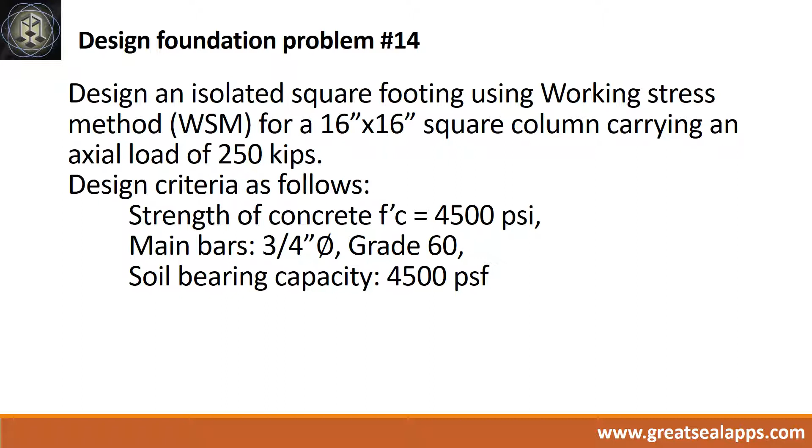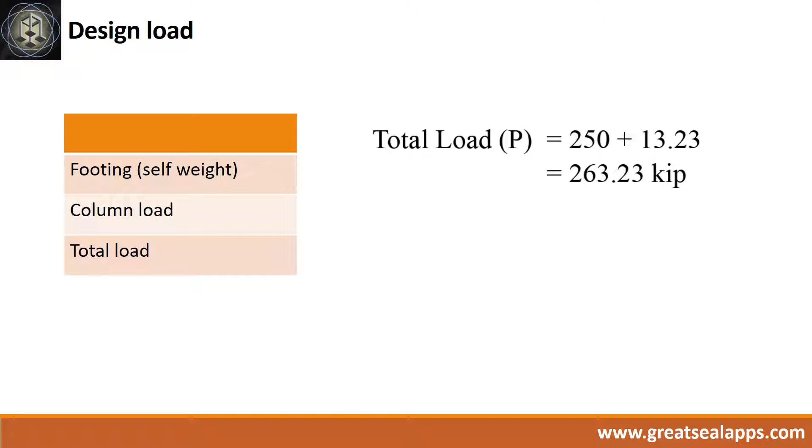Design an isolated square footing using working stress method for a 16 inches by 16 inches square column carrying an axial load of 250 kips. Design criteria as follows: strength of concrete 4,500 psi, main bars 3/4 inch diameter bar grade 60, soil bearing capacity 4,500 psf. The footing carries an axial load of 250 kips. Assume a self-weight of 13.23 kips for a total load of 263.23 kips.

Enumerate input parameters required. Footing name F14. Square shaped. Depth from natural grade line 5 feet. Main bars 3/4 inch diameter at grade 60. Strength of concrete 4,500 psi. Soil bearing capacity 4,500 psf, a 16 inches by 16 inches column on top of footing with total load of 263.23 kips.

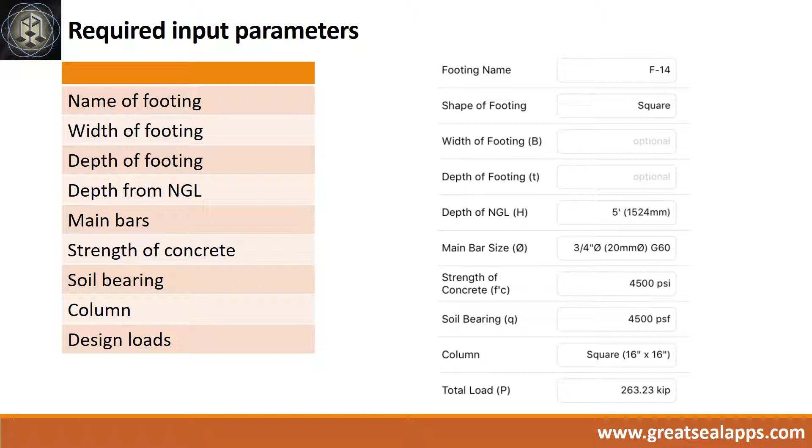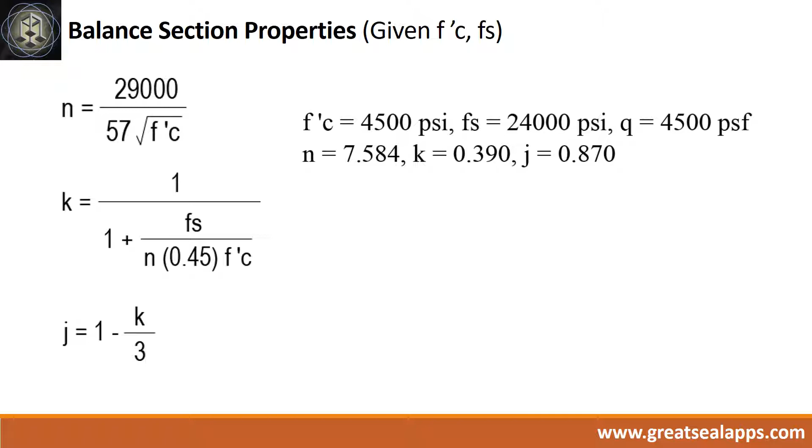Given Fc prime equals 4,500 psi, Fs equals 24,000 psi, the balance section properties are as follows: n equals 7.584, k equals 0.39, j equals 0.87. Given P equals 263.23 kips and Q equals 4.5 ksf, the width of footing is 92 inches. Net upward soil pressure is 4,254 psf.

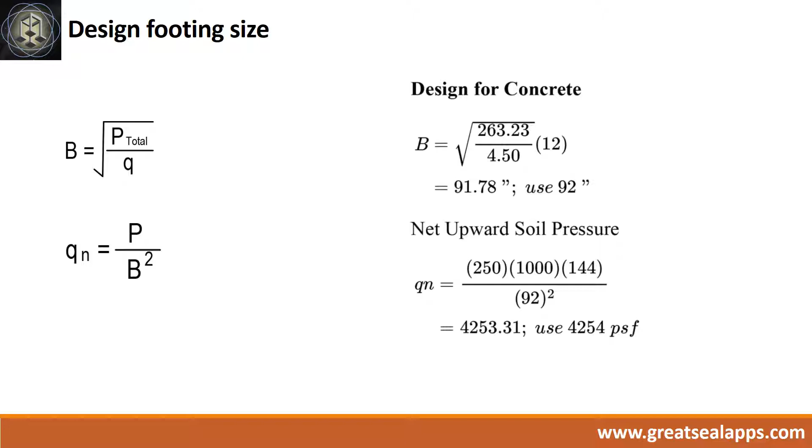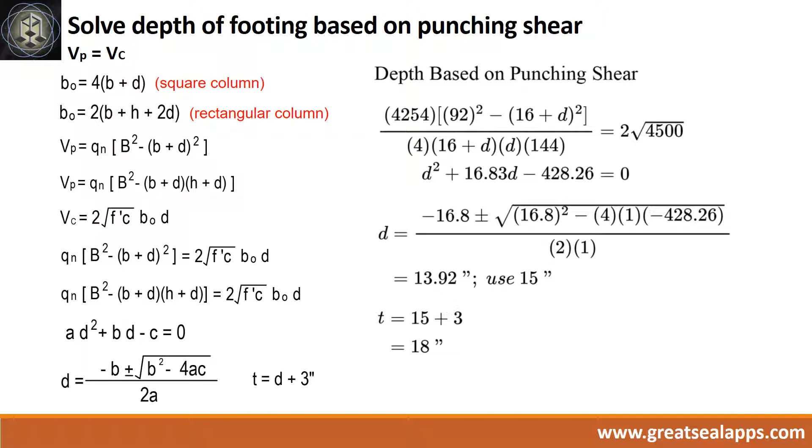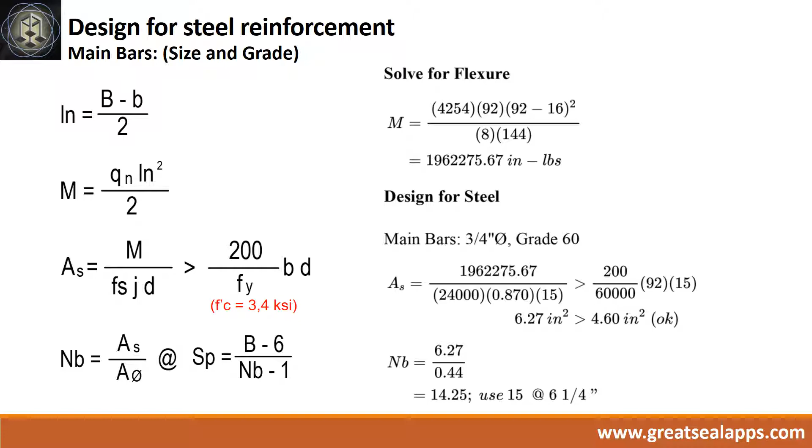Critical sections for punching shear, beam shear, moment and bond shear. Following the given computations, the effective depth is 15 inches and total depth is 18 inches. Given footing width of 92 inches, 16 inches side of column, and net soil pressure of 4,254 psf, the moment is 1,962,275.67 inch-pounds. The area of steel is 6.27 square inches. The number of bars for 3/4 inch diameter is 15.

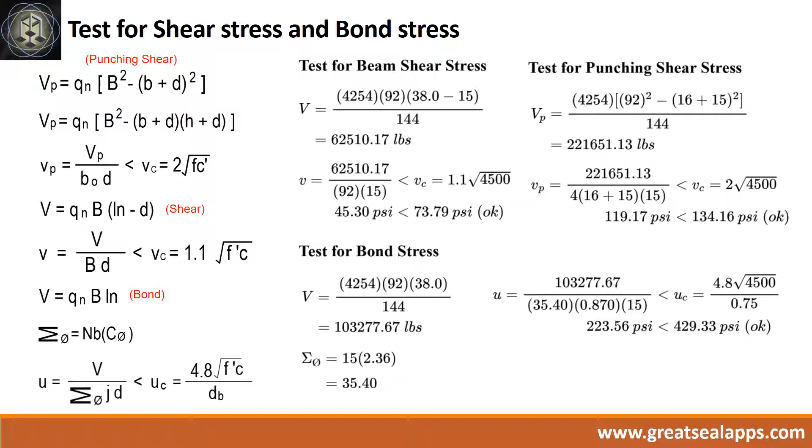The beam shear force is 62,510.17 pounds, and shear stress is 45.30 psi, less than 73.79 psi. The punching shear force is 221,651.13 pounds, and shear stress is 119.17 psi, less than 134.16 psi. The bond force is 103,277.67 pounds. Total bar circumference is 35.4 and bond stress is 223.56 psi, less than 429.33 psi.

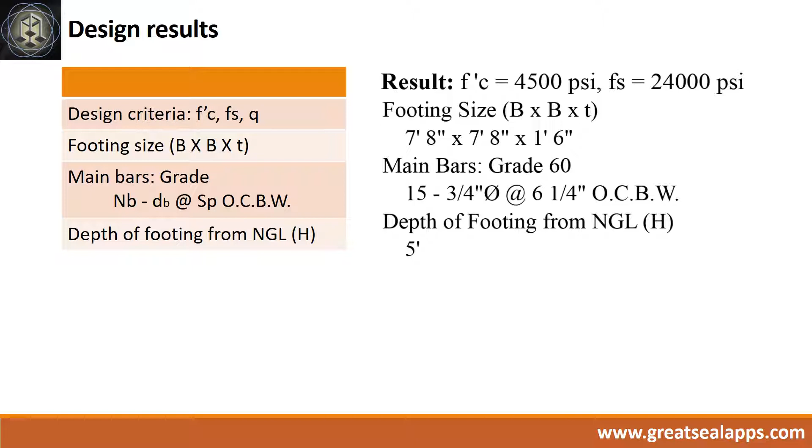Design results are as follows: Fc prime equals 4,500 psi, Fs equals 24,000 psi, footing size is 7 feet 8 inches by 7 feet 8 inches by 18 inches, main bars of grade 60, 15 pieces 3/4 inch diameter bar at 6 1/4 inches on center both ways. Depth of footing from natural grade line 5 feet.